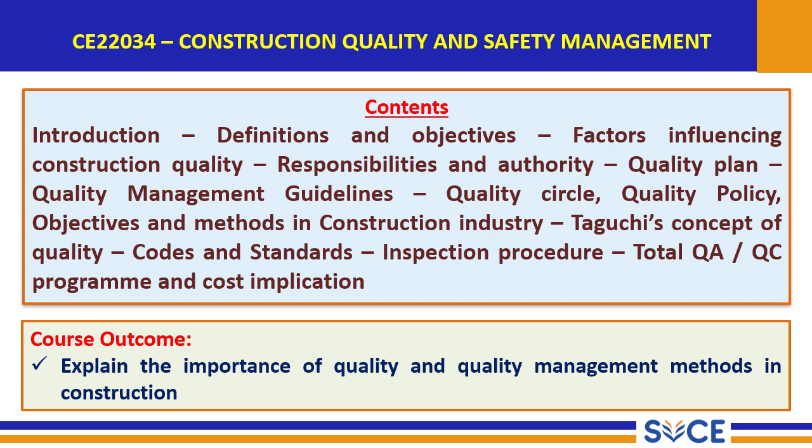So the introduction part. Before getting into the objectives of quality and what is quality, the quality of construction is one of the matters of great concern with most civil engineering constructions. So the following statement recorded during the reign of Babylonian king is worth mentioning.

If a builder constructed a house and did not make his work strong, with the result that the house which he built collapsed, causing the death of the owner of the house, the builder shall be put to death. In those periods, whenever a builder was asked to construct a house, if it collapsed, then the builder will be killed on spot. So that is the punishment they gave during those times.

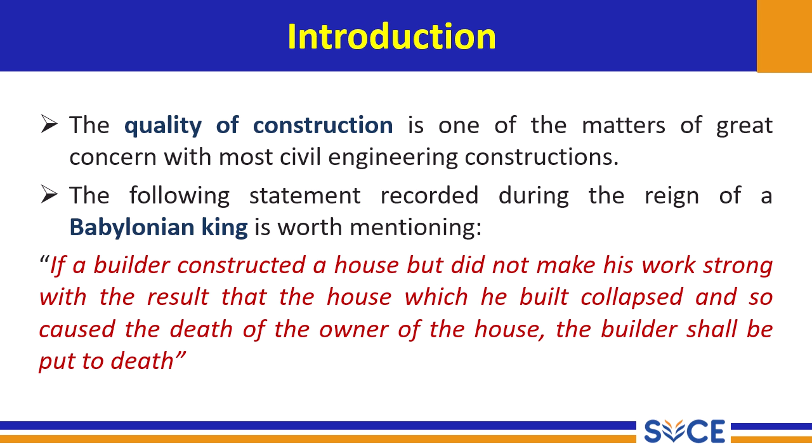So quality is very important because nowadays existing laws might prevent such harsh penalties in the present scenario, but the consequences may rather be in terms of loss, in terms of productivity, additional expenditures by way of rework, repair, reinspection and retest in the short term. So we are going to pay extra money in spending, for repair, reinspection, rework of the activity. So those are the additional costs - the cost which we have not actually planned for.

So these things will come into picture whenever we don't follow proper quality on our side. It also affects the productivity of the labor. So the consequences directly affect the overall completion of the project - quality, cost, time, everything.

In the long term, poor quality can hurt reputation - it hurts the reputation of the company. And if the company continues in the same way, it might have to close its shop for want of new projects. So you might not get projects in future whenever you go for tender or getting government projects. If a number of companies in a country start neglecting quality aspects in their projects, this also starts reflecting in the reputation of the country. So when companies in a country neglect quality, the reputation of the country is also affected, and the overall economy is affected because of this quality management aspect.

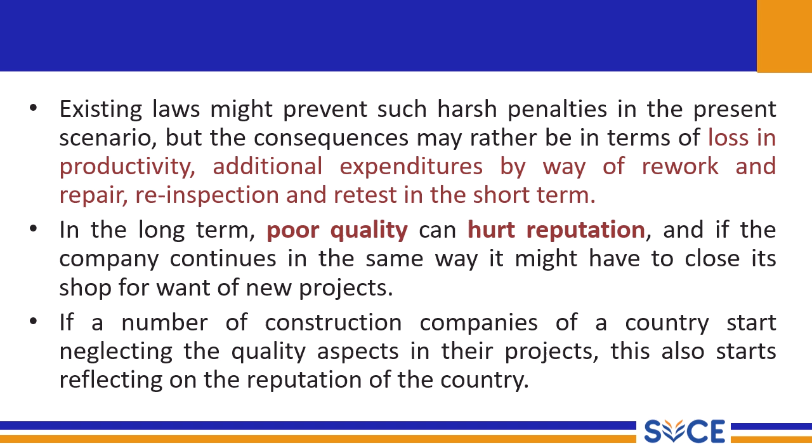So there is a great difference between quality of the constructed facility and the samples that are submitted for testing. Whenever we submit a cube of concrete for testing purpose, quality check purpose, the quality of the facility is something different from the sample actually submitted for testing. For example, the quality of concrete is checked from the cube that is cured very well, but the actual constructed facility might not have received adequate curing. So this is the difference where the difference in strength also we can identify.

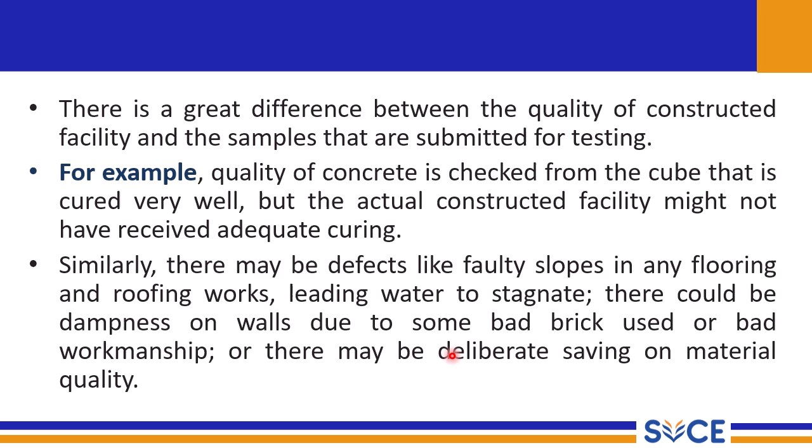Similarly, there are many defects such as faulty slopes in flooring and roofing works, leading water to stagnate. There could be dampness on walls due to bad brick used or bad workmanship, or there may be a deliberate saving on material quality.

According to conservative estimates, the cost of poor quality could be as high as 200 to 300% of the cost of construction in early ages of work, in some cases, which is a severe drain on our precious resources. The contractors are asked to rectify the defects, but many times they are irreparable, and users are forced to take over the facility, even with a long list of defects.

So this is what happens when you don't follow quality management. The contractor might get a chance to rectify, but sometimes, due to their negligence, it is irreparable. So users are forced to take over the facility along with the defects. And the cost of poor quality could be as high as 300% of the cost of construction - meaning it's three times more.

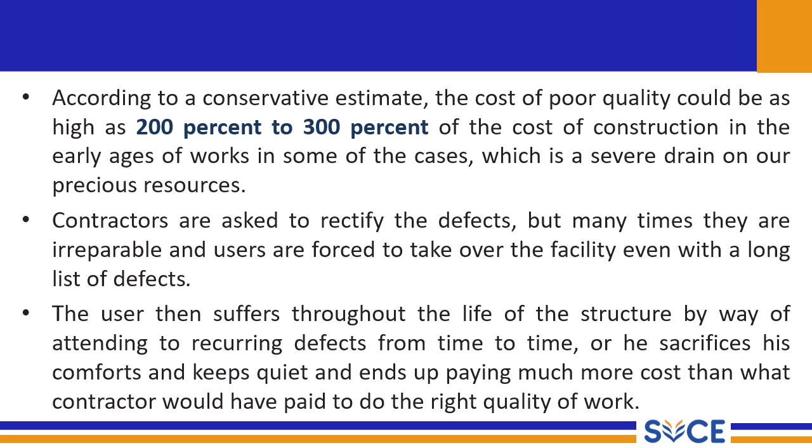The user suffers throughout the life of the structure by attending to recurring defects from time to time, or sacrifices comforts and keeps quiet, ending up paying much more cost than what the contractor would have paid to do quality work. If the contractor had paid proper time and followed proper specifications during construction, there would be no extra money paid after completion due to recurring defects.

Construction quality has not got enough attention, also due to the policy of awarding the project on bid price alone. This is one of the major factors. Whenever we award the project to the contractor, we award based on bid price - whoever bids the lowest price gets the project. So the lowest bid system is one of the major problems here.

The inherent assumption in adopting such policies is that given the same set of drawings and specifications, all contractors, including those with the lowest bid price, will produce similar quality. Unfortunately, this is not often the case. The lowest bidder reeling under cutthroat price tends to cut corners and start compromising on quality.

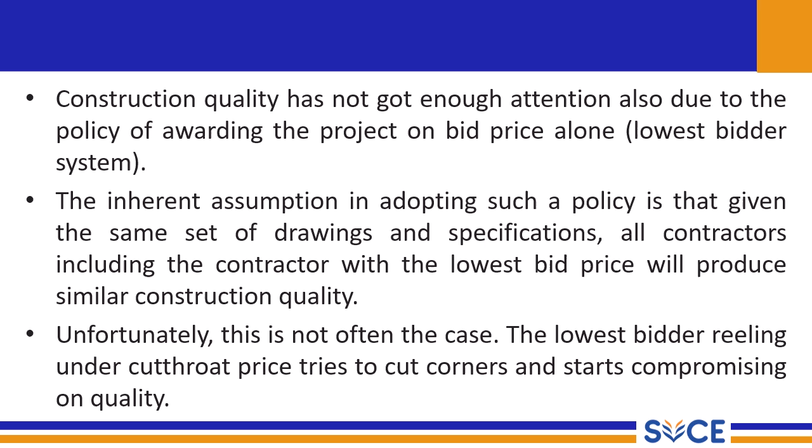So whenever we give projects based on price, contractors start compromising on quality. At the starting you can't see it, but at the end of the project you can see it - after completing the project, you can visually see how much they compromised during the course of time.

The majority of such contractors tend to neglect customer complaints and produce bad quality work. In the short run, such contractors rise very fast, but in the long run they ultimately fail. In the beginning it may show like steady growth, but in the long run they fail because it creates bad reputation among people - once you create bad reputation, people won't go for your work because you produced bad quality.

On the other hand, there are contractors who consistently attempt to produce good quality work. In the short term, such contractors may seem to be on the losing side because they spend more money and won't get much projects. But in the long run, they prove to be very successful, and some customers even engage them by paying extra - this shows customers are willing to pay for better quality.

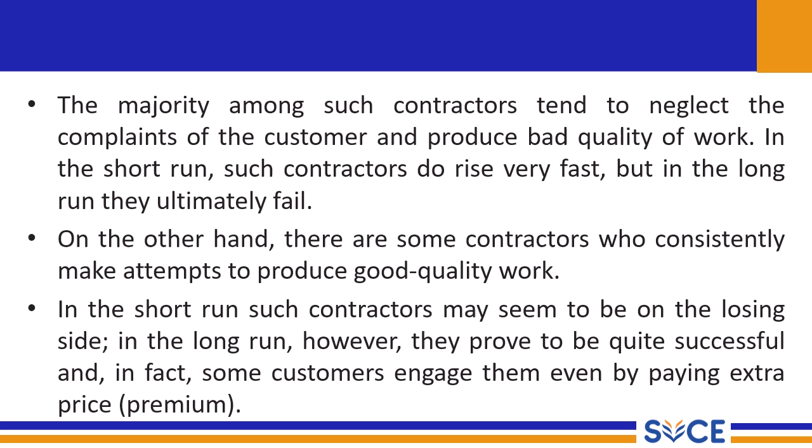If you pay money now, in the future you can avoid recurring defects and maintenance costs. While this concept is well understood in manufacturing industry, the same cannot be claimed for the construction industry. Now you have some idea about the different factors why quality has a major impact on the construction sector.

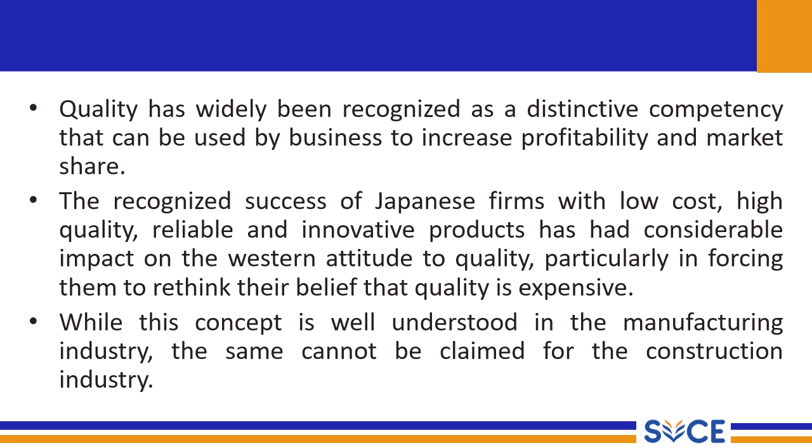Customer satisfaction is of paramount importance in quality management, which deals with life cycle cost - that is, after sales service or cost to users. Incidentally, in the construction industry, while the supplier is responsible for any defects during the defect liability period, typically 6 months to 1 year from the date of completion, there is no provision that can hold the supplier responsible for defects beyond that.

We cannot simply hold the customer responsible, nor can we always say the supplier is responsible for the defect - defects can occur due to bad workmanship. So we cannot simply say that the supplier has provided bad quality of product.

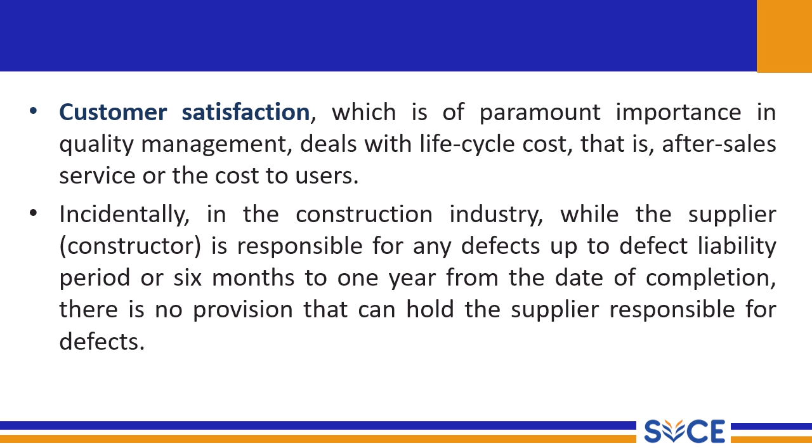Many times a customer takes possession of the constructed facility much after the defect liability period is over, and spends huge amounts of money in rectification, which may at times be irreparable. Sometimes some defects may be repairable, and some defects may not be - that's why they say it is irreparable.

Also, most customers are not so demanding with regard to the supplier because of their ignorance of their rights.

This is a short introduction about quality, quality management, and the importance of quality in projects. From the next lecture onwards, we'll be talking about quality defects, definitions, objectives, importance, etc.